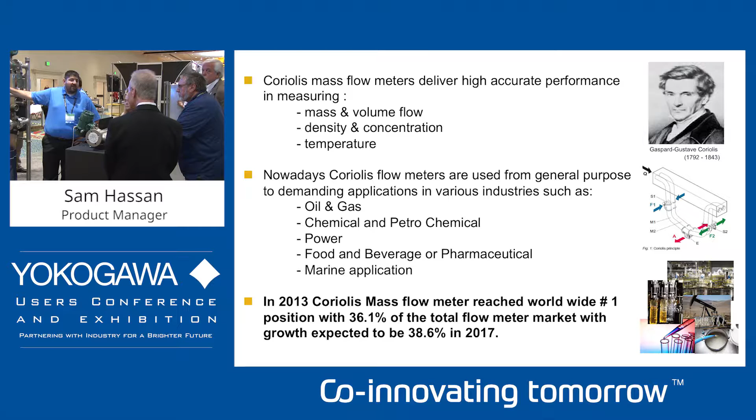Thank you for coming. Today we're introducing a new Coriolis mass flow meter. It's a Rotamass TI. Our previous model was the Rotamass 3 series. The Rotamass 3 was released maybe 10 years ago. And it's from our factory at Rota, Germany, which is a Yokogawa subsidiary. We'll have inventory here, support here, and service here as well for this product.

I have the presentation on the screen as well if it makes it easier while I talk for you, but it's up to you.

Coriolis mass flow is for measuring mass and volume, density and concentration measurements. That's typically what it's been used for, and it's used in oil and gas, chemical, food and beverage, refining, any application you can really use. Why they use Coriolis? Everybody's going to more mass, and mass is a constant, whereas the volume is a variant.

So currently we've seen the market, the Coriolis is probably the biggest portion of flow meters globally in terms of dollar value. It's currently, I think, 34%, 36%. In 2017, it's going to be 38% of the market in terms of volume. So there's a big push for the Coriolis. Costs have significantly reduced from when they came out 20 years ago.

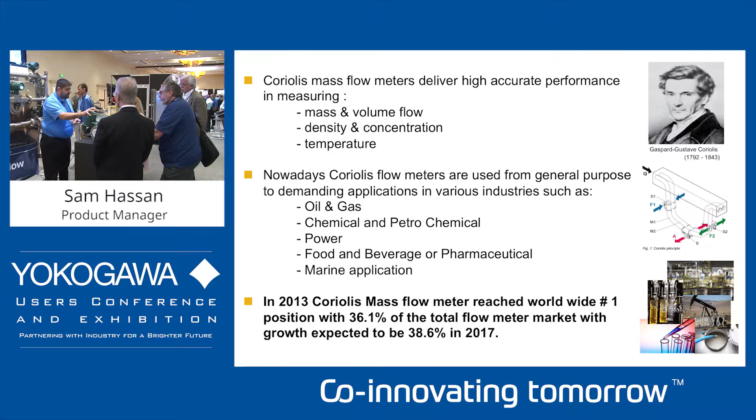So before where you would use a mag meter instead of a Coriolis, now it's somewhat feasible to use a Coriolis. And when you consider the additional benefits of the Coriolis, in terms of diagnostics and insight into your process, it becomes a lot better total cost of ownership to the end user. So why do we need to develop a new Coriolis? Well, we wanted to reduce energy consumption. The biggest issue you have is pressure drop.

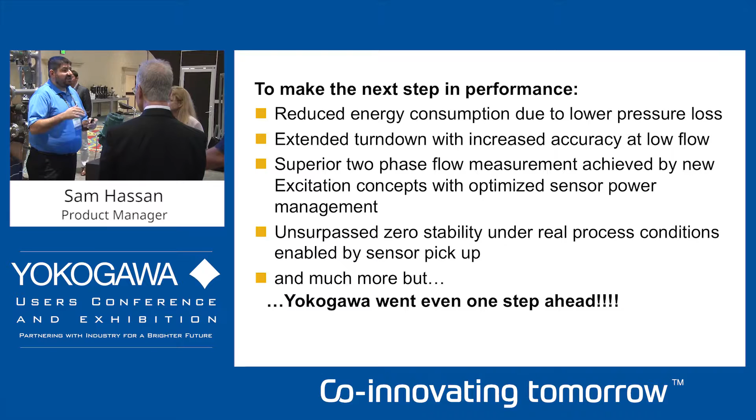A Coriolis is typically two tubes coming in, two bent tubes, and they flow through. But when you have that flow split, you get a pressure drop, and you need more energy, more pump power to pump that through. We also wanted to increase the accuracy at the low flow range. We need to get the better stability, so we have more of a flat specification. Typical specification is not so linear on a Coriolis.

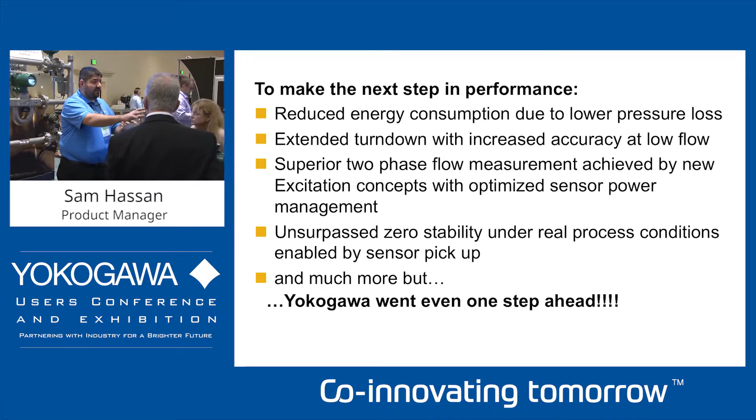We also enhanced it for dual phase. So now a big issue is entrained gas. So we introduced a new excitation functionality in this unit, where it automatically adjusts the power drive based on how much entrained gas you have in your system. Where this comes into benefit as well is, for example, in the Rotamass 3 we had it, and we're enhancing it in the new series, is what we call the net oil and gas void fraction measurement.

We just got our patent approved for that, where we can now measure how much water is in your oil and how much gas is in your oil. Now, most people can do this, but they do it separately. You either set it up for oil or for gas. We can set it up so once the oil changes to gas, it'll automatically switch over and give you the gas void fraction.

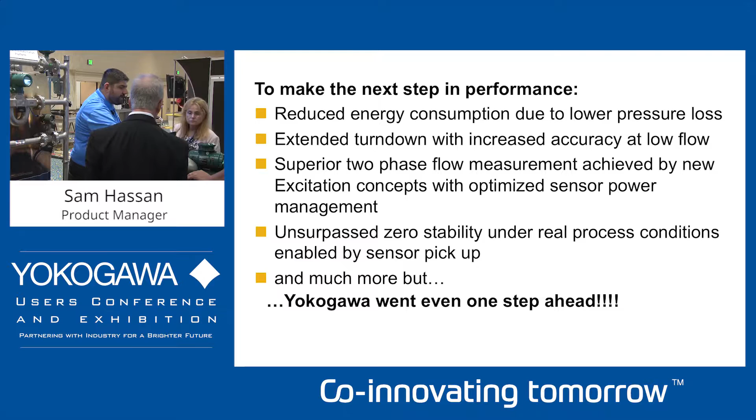Also, we fixed up the pickups. There are pickups in here that measure the tube and how far they move. We've enhanced that to give you better zero stability. So now we have a true flat specification to the very low end of the unit. Before, like I said, it would deteriorate. Now it's a true flat specification in our unit. And there's a lot more that went into fixing the physical side of the unit.

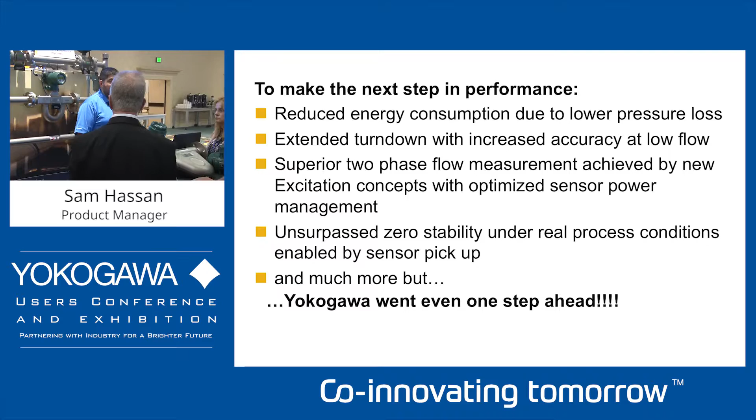But we went one step further. A measurement is a measurement, and everybody can get an accuracy. For now, for example, it's 0.075% accuracy. What makes us different? How do we differentiate this? Well, when you look at the life cycle, you've got the engineering and purchasing. They need to purchase a unit. They need to know they're ordering the correct unit, sizing the correct unit.

If they have the installation configuration, does the service tech know that he's setting it up correctly? You go through to the operations and observations. Is the unit still running efficiently? And as we go through this, the maintenance and calibration: does it need to be maintained? Does it need to be calibrated?

Service and repairs, when do I send it back? And modifications, what if it doesn't do what I need? Do I have to upgrade? How much is it going to take? So we took this into consideration. So instead of just focusing on the measurement, we focus on the life cycle for the customer.

So now what we have released is what we call the Rotamass TI, which actually stands for Total Insight. So we have the total insight of the product ranging from advanced flexibility, simplified selection, data mobility, the expert guide, maintenance manager, and the process guide. So what does that mean for the end user?

So when we talk about simplified selection, now we have a 6 range. Before we had one set of unit, one body, one style to choose from. Now we have a family of 6 units. We have the Rotamass Nano, which is for the small flow rates, very small flow rates. We have the Giga, which is for the large.

Sorry? What industries? The small Nano is typically chemical injection. Chemical injection dosing is used with the smaller. We use it a lot in pharmaceutical, and very expensive chemical dosing is where that's typically used. The Rotamass Giga is the large sizes, up to 600 ton an hour for your loading, oil and gas, your pipeline transmissions, and so forth.

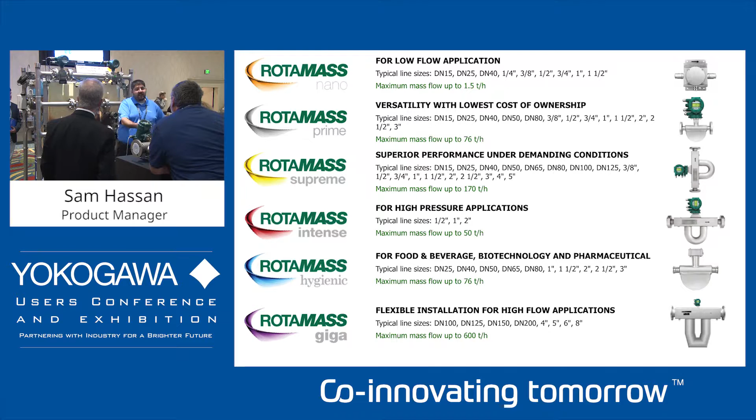And this is the problem we had in the past. We had the one line. Now we have multiple lines to select from. So if you can see here, you have the different levels there. So you got the Rotamass Nano for the low flows, up to the Rotamass Giga for the large flow. So we have now 6 series of flow tubes.

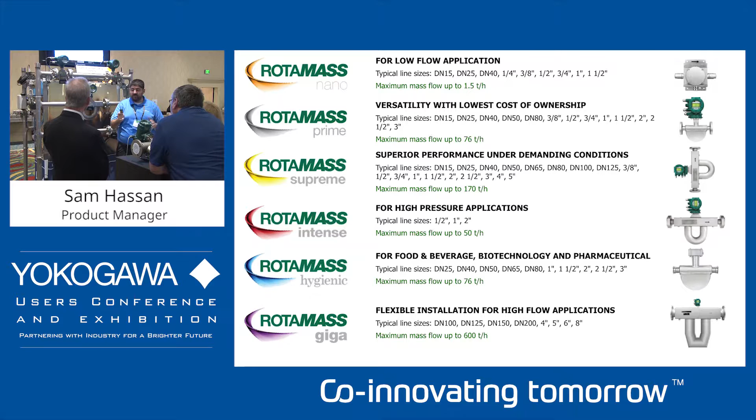To go with that now, we actually have 2 transmitters. We have the Essential, which is your basic cost-effective solution for general purpose applications. And then we have the Ultimate, which adds in extra functionality.

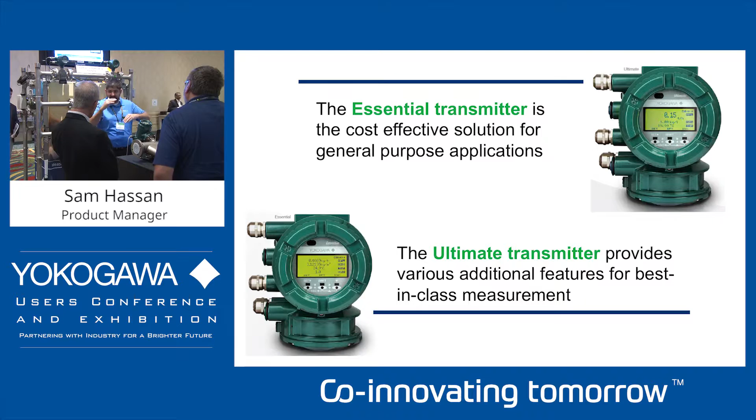So the Ultimate has built-in verification, which we'll go through in a moment as well. It has multiple I/O combinations you can select from. It has the lockout functionality, concentration measurement, the net oil. It has a function which we'll discuss in a moment, called features on demand. So now you have that option of selecting, and they both have different accuracy ranges for both the mass and the density. Then we move on to the expert guide.

So now we also have a simplified, easy startup. A Coriolis, in terms of a flow meter, is so much more complex than a mag or a vortex. A mag meter, you set up your span and you're done. That's it. With a Coriolis, you've got to set up a lot more variables because you have so many more variables in there. Well, we have an easy setup guide now. When you go through it, it walks you step by step how to set up your process.

It's all software, right? Sorry? Desktop software. Oh, you can do it through the display. And yeah, we can do that through our FieldMate software as well. We also have an expert guide, for example, through this display. Yes. Or on the computer. Or on the computer. So this is our FieldMate software here.

For example, when you're setting up concentration measurements, typically you have to send it to the factory to do your curves. Now with a simplified display, you can go into the FieldMate, put in your own densities at the different pressures and temperatures and concentrations, and create your own curves. So it gives the end user a lot more flexibility to change as they go.

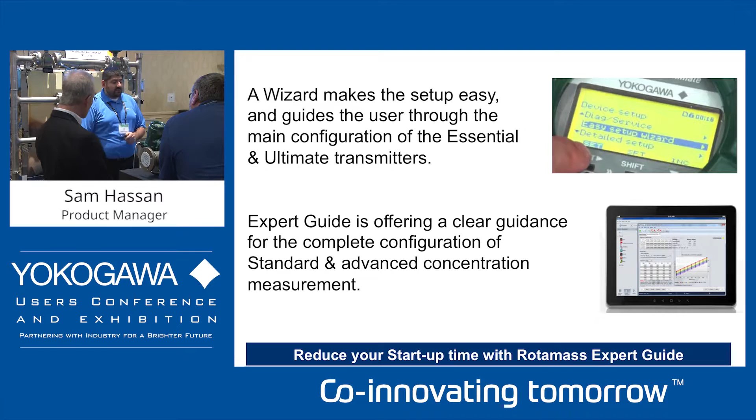We also have what we call the process guard. So we have an event management functionality and the data logging functionality. Event management, as I was saying earlier to the gentleman, is NAMUR 107 compliant, especially for chemical. It has over 157 event management functionalities in there. So if there is an event, you can set this unit to hold value, to go high, to go low, to alarm, to error, and they're completely configurable in how they're set up.

The data logging functionality constantly keeps track of the last 10 data points. So whenever there's an alarm or a system upset, it will log the last 3 data points, the alarm point, and the future 3 data points. So you can go back and analyze what happened in that upset. It's logging not just the typical process variables, but also things like the drive gain and the output from the pulse, so you can go back and see what happened at that point in that event.

What if you wanted a longer history? Can you? Absolutely, you can. The unit actually has a built-in SD card. I'll talk about that in a moment as well. We can actually data log your information.

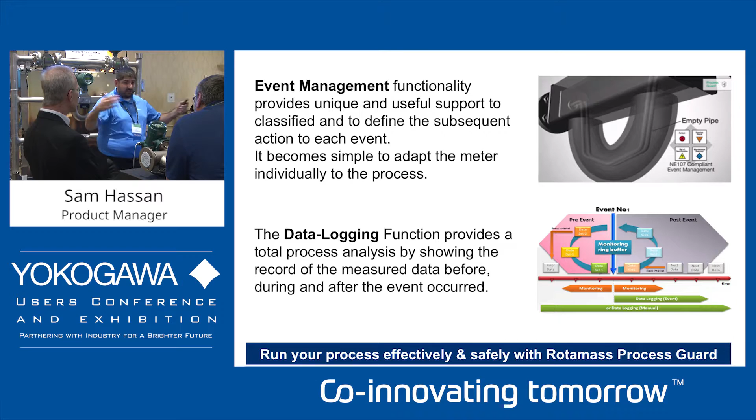We have the maintenance manager, where we talk about the tube health check. We've got a patented tube health check, where we can see when the tube stiffness starts to go, or it starts to corrode. We're constantly checking. So as soon as it starts to go, you can get that warning or that alarm or that output that your unit needs a calibration. And we have what we call a total health check, where we check from the electronics to the temperature sensor to the health of the tube.

So it's a built-in verification. Within 90 seconds, you can have a full verification and a report. So no longer do you have to take this unit out of the line and send it somewhere to calibrate. You can do that in the line, and it operates during the process, so you don't have to stop your process to do that.

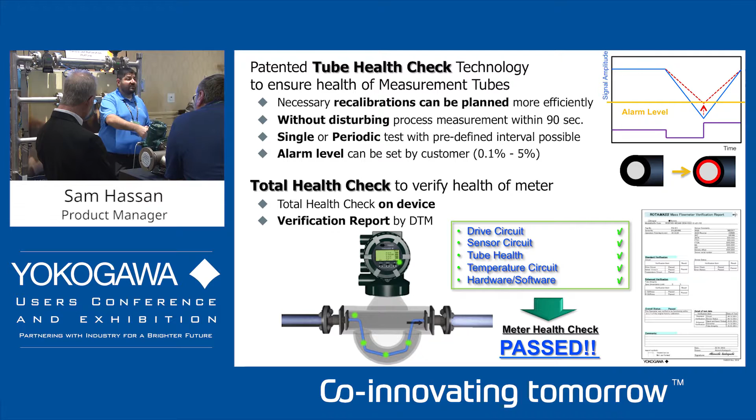We also have what we call data mobility. So in these units, there's a great little functionality that comes with an SD card in the unit itself. And the SD card is stored in the display. Smart. So now you can keep it in there in explosion-proof areas without having to open it up and put a USB. I just pull that out. Sorry? There's a lot of history. A lot of history. Yeah, so you can put this in there.

Now, not only does this hold those data points, but you can hold the trending value like you're asking. The display can actually show the trend graph. It also holds up to 3 configurations. So say you have different configurations during different seasons, for example, batching, summer or winter, and they change. With the status input, you can change the configuration or download the saved configuration.

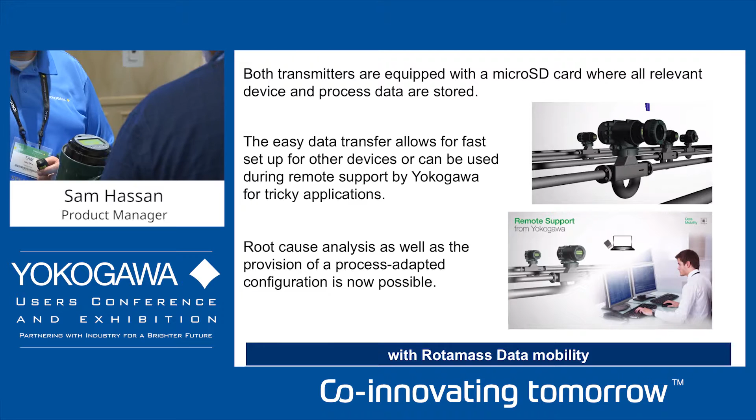At the same time, if you're commissioning multiple units and they're set up the same, you can just take out the SD card, put it in a new unit, and download the configuration automatically. Sorry? So quite a few companies are now doing their blending of formulated gasoline for different seasons online, rather than batching it from tank to tank. So this could be useful. Absolutely. We've got a full batching functionality built into this, especially for that sort of application.

Even the display itself has a copy of the latest configuration. So say for some reason your electronics go out, you can change your electronics and just put the same display back on, and all the information is saved in the display and downloaded into the device. The other good thing is if you are recording device data, or if you're trending and you know you're having issues, you can set it up to record different types of data that comes out of this unit.

You can record, say, a week's worth, take that file, put it into your computer, and email it to Yokogawa support. And we can then look at it and say, okay, we see the drive gain increasing here, we know you have entrained air. What happened at this time on this day? So now you can do off-site support without somebody coming into the site to see what's going on with the unit.

Because entrained gas typically has really thrown these things off. It does. Big time. Whether it's a reduction in pressure from the field well, you're relying on the pressure. Sometimes it's a pump with a bad gasket that's pulling air in as it pumps through. Honestly, 60% of issues we see with Coriolis are entrained gas issues. And no one wants to say they have entrained gas. It's always the instrument. It's telling you exactly right.

So the drive gain is what powers the tubes. The more air that's in there, it dampens the tube, so you have to drive up higher. So if you see your drive gain increasing, you know for a fact that you have entrained gas in there. Do you have to go out and get the SD card? You can do it remotely if you have a HART signal. You can log it in your system and send it to us. All the information is available through the digital signal as well.

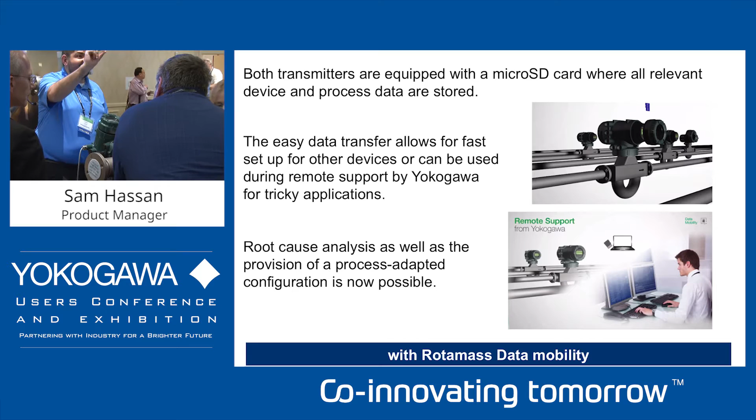And if you look at the display, I don't know if that one there is easier for you to look at as well, there's a little padlock you can see. So when the unit's locked, that padlock shows that it's locked. So nobody can access it. So you know it's only accessible by yourself.

We talk about advanced flexibility. Like I said, currently we have 20 I/O combinations. So we've got 20 I/O, up to 4 I/Os, and you can have status inputs or status outputs. You can have analog input or analog output. So you can input a pressure transmitter, and you can input other devices. So for example, we're working on a water cut meter to work with the oil and gas.

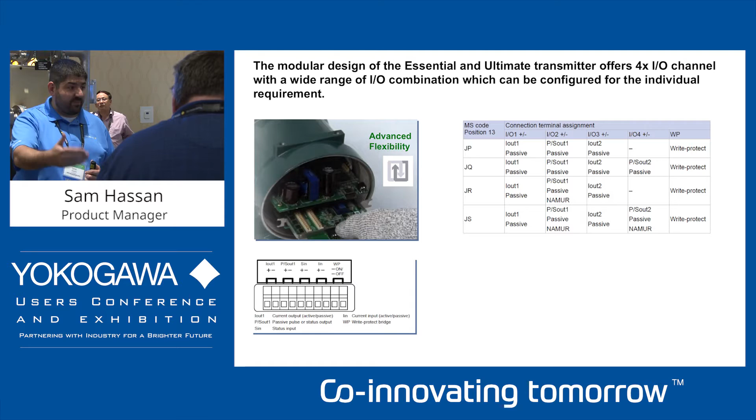We also have a wide range of I/Os, and we're building that as we get more protocols like Modbus and Ethernet. We also have a wide range of global approvals. And we have a universal power supply. So whether it's 24 volt or up to 240 volt, you can use one power supply now. So there's no more confusion of miswiring and burning the unit out.

Advanced flexibility, this is a big one. So somebody might purchase this unit and then realize, oh, I wanted net oil calculation, or I wanted batching functionality, I wanted concentration measurement. Now they have to send it back to the factory or order a new one to get sent out. No, now they can just send us a serial number and we can provide them with a key code that they can put into the unit and unlock that functionality in the firmware.

Oh, you've got it all there, they just turn on the one they want based on the key code. So it's like a software upgrade. That's right, yeah. But you've got the software for 6 different things in there. It's all in there. The software's all loaded in, based on the software requirement, absolutely. So now there's no need to send it back.

So now the customer can buy one model code, for example, and this is where the cost comes to the end user, is if they've got different applications, but it's the same size, you can keep one unit, and then if the application changes and they need to put it in, they can just add that functionality as needed. They don't have to order the full gamut for every product that they have on their shelf.

So is this more robust in terms of straight length you have to have before you get to this? Well, with the Coriolis flow meter, you don't have any straight run required. You can pipe directly into it and out of it. The only thing we wouldn't recommend is a 90-degree coming from the sides. And the only reason we don't recommend that is because if you have entrained gas or you have a slurry, it doesn't distribute the slurry or the gas proportionally. But if you're coming from a reducer or from a valve, it doesn't matter, you can go straight to the unit.

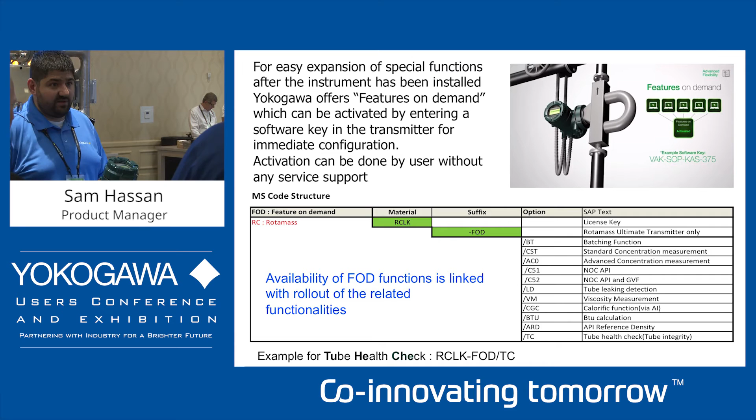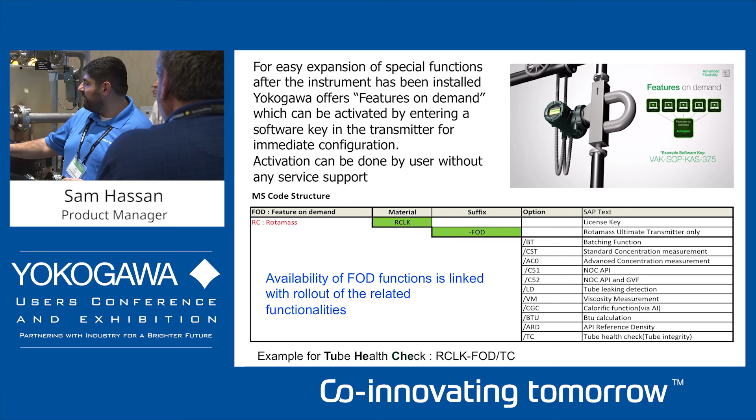Yeah. And the biggest no-no is you never want to install your Coriolis in the horizontal plane. Because if they put it on the horizontal plane like this, you've got two tubes, you have one weighing more than the other one, and it affects your measurement. So what you would do is, if you're measuring liquids, you want to have it like this so the gas disperses. If you're measuring gases, you turn it upside down.

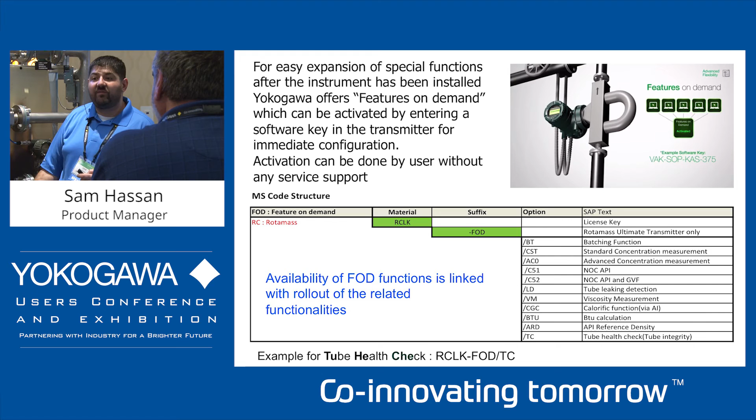Now, the most preferable way is always to install it in the vertical. If you install the Coriolis in a vertical position, you're always going to have your gas go up and your liquid's always going to drain out. So there's nothing ever left in your pipe when you shut it down. But that was a quick synopsis on this.